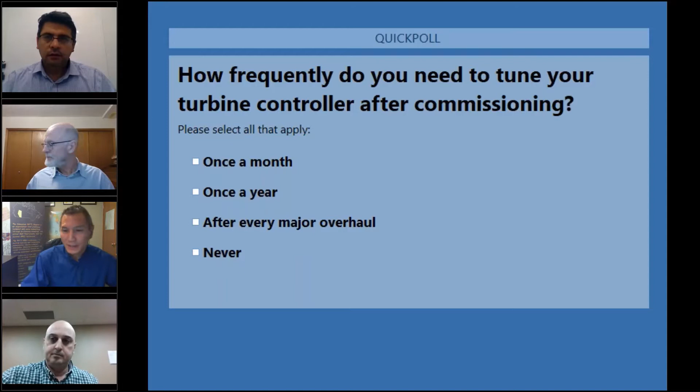So I'll give a quick introduction about myself during this time. My name is Ashraf Abdelrahman. I've been working with Madsen now for 5 years - we are the Woodward representative in Canada. Woodward is a company from 1870, so we started in the 1870s, originally designing governors for hydro applications. Now in 2020, we're doing aircraft engineering and so many other things within Woodward, and we are the representative in Canada.

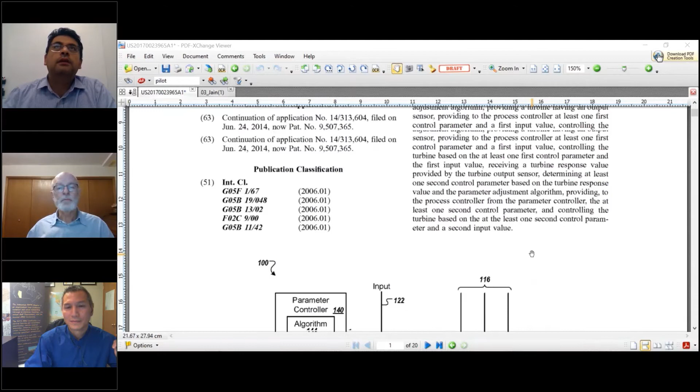Today I will be happy to discuss with you one of the patents that Woodward has made. It's about adaptive PID tuning. I think we've shared that patent on our LinkedIn account, and you can see that patent there. Basically this presentation is all about how we are doing that adaptive PID tuning.

So without further ado, can we see the result of the poll right now? Yes, that would be the perfect time for that. And so here we are.

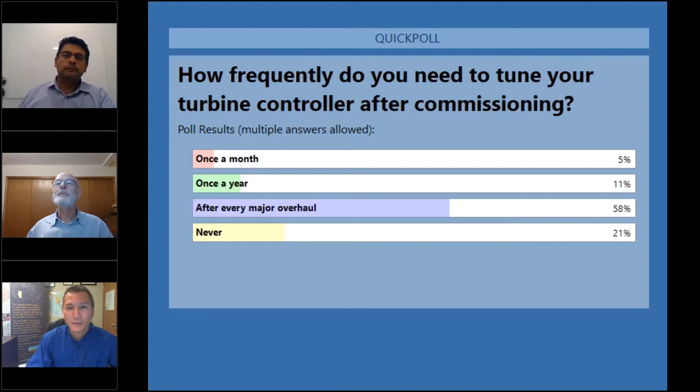Seems like most people are doing it after an overhaul, basically, 58% of people. Surprisingly, 21% have never tuned their controller, 5% say once a month, and 11% say once a year. So it seems like after a major overhaul it makes sense to retune or recalibrate your controller at that point. So I'll shut down the poll and continue on.

Okay, thank you very much. So this is not a surprising value, that most people do the tuning of their PIDs after major overhaul. But today I'm going to discuss a little bit about the issues that we face with tuning of these controllers, and we're going to go through them. After that, we will have a lot of discussion probably about, yes, we need to do it frequently, not frequently, and so on and so forth. So I think by the end of the session we'll have a little bit more understanding about what we are calling the adaptive PID tuning.

Because using adaptive PID tuning, you can do it as frequently as you want, not like back in the old days where you're afraid to do it manually. But let's go through the presentation, and by the end of it we'll understand how easy it is to do PID tuning nowadays, so that you don't have to do it just every major overhaul. You can do it whenever you start to see any performance changes within your turbine.

So conventionally speaking, as a user you have three types of PID parameters you are controlling: the proportional, the integral, and the derivative. If you use only the proportional, you will reach your target but with a steady state error. So basically, if your target is to reach an RPM of 3,600, you will reach 3,400 with a steady state error. To reduce that error, we introduce the integral, which is used to get you as close as possible to zero error. But the problem with the integral is that it sometimes causes delays and overshoot within the system, and that's where the derivative comes in to improve the delays, so you can improve the response within your turbine.

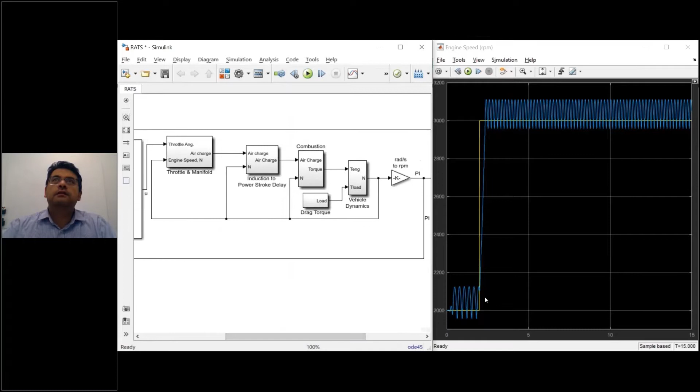For example, I'm just going to give a quick example that we can look into and see how it's working. We have here an application where we have an engine with a speed control, with a PID controller. And as you can see, that engine is behaving unstable. You can see there is a huge error coming out of it, and there is instability within the system.

So to improve the stability of the system, you start to tune the PIDs or use the PIDs. Right now the proportional is 1, so it's almost nothing. So if you start to tune the PID, reducing the proportional, you will see here that the performance of the system starts to improve a little bit, but you still have that error.

Basically the system here is an engine that's required to change speed from 2000 RPM to 3000 RPM. But because of the proportional gain alone, you still have that steady state error. Of course in a normal application this is just a simulation — the steady state error would be much smaller, but this is an example of what the proportional gain does: it just allows you to reach the system target, but you still have the steady state error.

To reduce that error, as we discussed, we need to add the integral gain. So I'm going to change the integral now, putting it into effect. Instead of 0, I'm going to put a value here, 0.01.

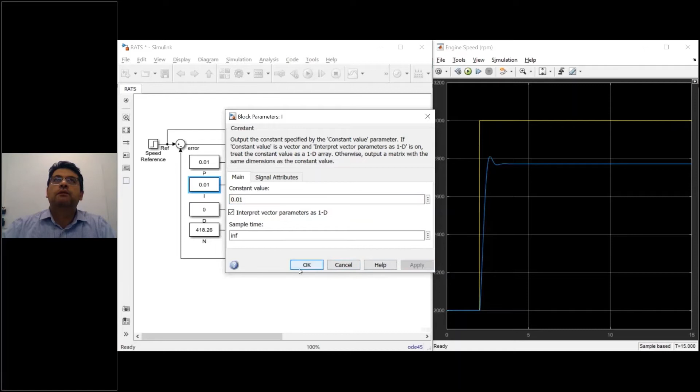And I will run my simulation again. Now we reach the desired effect that we're looking for.

Depending upon how aggressive your system is, sometimes customers use their steam turbine in applications like frequency control, where they need to control the frequency of the whole grid. And sometimes that delay between the actual speed that they are looking for and the controller or turbine to reach that effect makes a big difference for them.

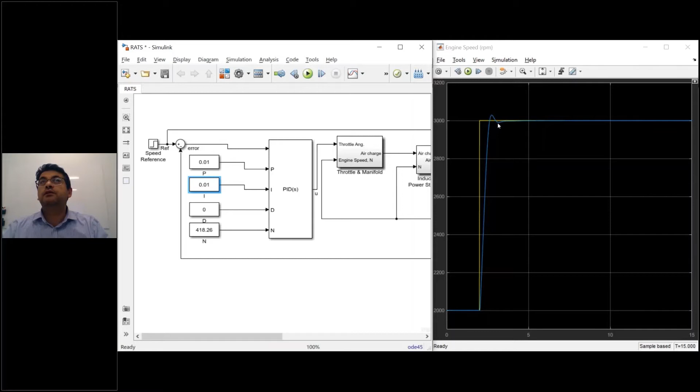So we can introduce at that time the derivative term, which I will introduce right now. And you can start to see that the system will start to become more aggressive to reach its objective, but you will have a faster response out of the turbine itself.

So as you can see here, the turbine response becomes more aggressive, reduces the overshoot a little bit, and you have a more stable turbine.

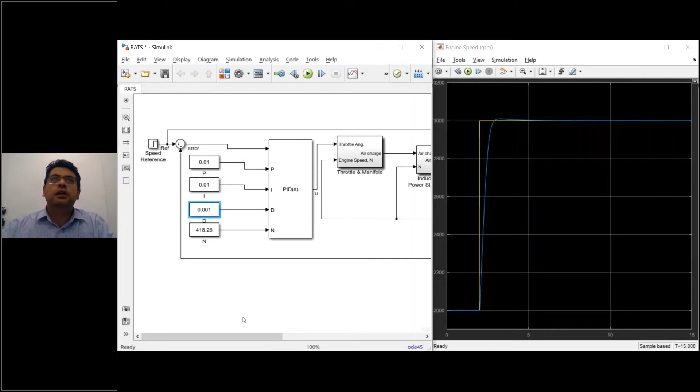So typically, a commissioning engineer will go to the site and spend maybe one or two days until he can figure out what are the values that I need so that I can control my turbine, what are the values that I need to achieve my objective, basically.

And to achieve this objective, usually what we provide, or what we need as control engineers, is to know the system, to understand the behavior of the turbine, to understand the behavior of the final control element, which is usually an actuator or a governor.

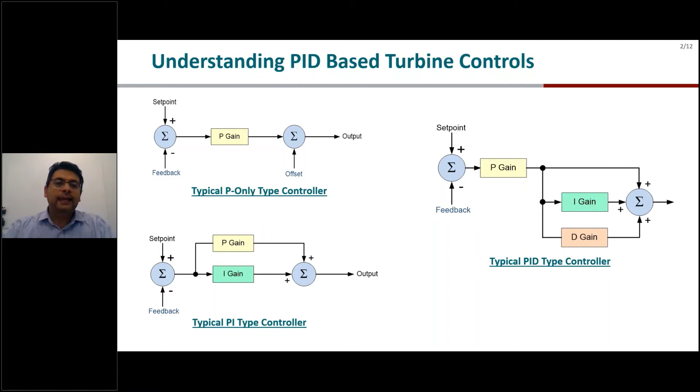So to understand all of these parameters and their effect on your system, we have to understand what can cause instability in my system. I finish my turbine, I commission it, and then I have instability. What are the reasons for this instability? Why do we need to retune our turbine every couple of years as performance behavior changes?

Usually as the turbine gets older, you start to have issues. This is an example for a typical steam turbine governor, where you will have a hydraulic, electro-to-hydraulic valve, then a pilot valve, and then the steam valve itself that controls the opening and closing of the steam, allowing the steam to boost to the turbine.

If you look at them, you may face so many mechanical issues. One of them is the sticking of the governor valve. The other is also the linkage, the linkage between the governors and between the joints in here. As the turbine goes older and older, these linkages start to wear out and have issues. You need to accommodate for these issues within the controller, especially as the turbine gets older.

There is another type of valve which we call poppet valves, which is like 6 or 7 valves, and each one opens, allowing a certain amount of steam to come in. As these poppet valves start to get worn out, you also have some instability coming in.

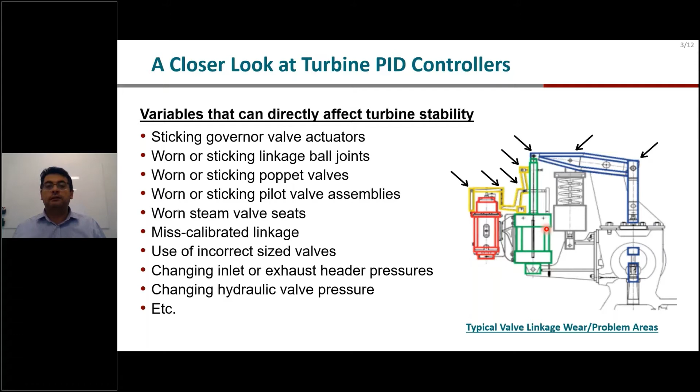To understand how to tune a PID, or to understand how the tuning of the PIDs of the turbine is challenging, I have here two examples of two types of PIDs.

This is a typical example, which we call a parallel PID, usually used within gas turbines, where you will have the speed PID in parallel with the acceleration PID, in parallel with the inlet temperature, in parallel with the exhaust. All of these PIDs go together, and the lowest value from these PIDs will be sent to the actuator so that it will allow more fuel or less fuel to go to the turbine. So if there is any problem with tuning any one of these PIDs, it will definitely impact the stability of the whole system.

If you are able to isolate which PID you have the problem with, you need to make sure that PID, when tuned, performs within the required customer needs. Parallel PID is the way we currently use for gas turbines, and tuning or retuning it requires an experienced engineer who understands the other PIDs and the impact of changing one PID, making one PID more aggressive than another, and understands the different modes of operation of the turbine and the requirements of each mode.

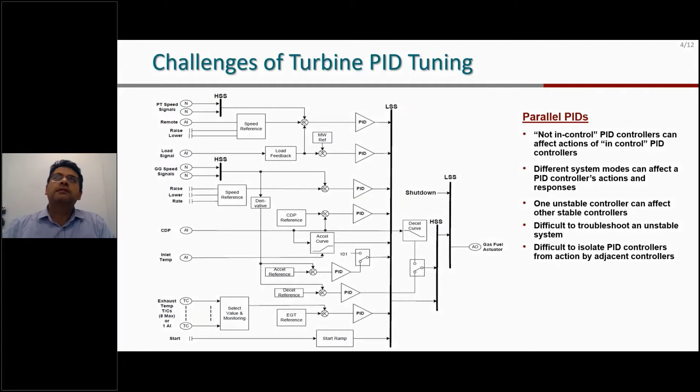In comparison, or in the opposite direction, there are series PIDs, which are typical within steam turbines, where you will see, for example, a cascade PID or a load PID controlling another PID, which is the speed PID. Usually the speed PID needs to be faster in response than the cascade PID, so that whatever change is required by the cascade PID, the speed PID will be able to do it.

And sometimes with the series PID philosophy, you have what we call a ratio limiter, which takes into account the speed PID and the exhaust PID. Both of them go together to what we call a ratio limiter to account for, okay, if the speed PID asks for 50% and the exhaust PID asks for 40%, they go through an equation and tell the HP valve within the steam turbine to open that amount, or the LP valve to open another amount.

As you can see, it's a complicated setup, one PID affecting another PID. Both have to work together in coherence so that you don't have one PID unstable and the other stable, which would affect the overall performance of the turbine.

Usually customers prefer to use the speed PID or the series PIDs in steam turbines because it allows us to control the minimum and maximum process limits. So I can say, for example, I don't want my turbine to go above this value or below this value because this is the maximum value I can reach with my turbine. Or in case I lose the speed set point, or some critical value like the pressure input, I can maintain the last value and control that. That's why people prefer to use the series PID rather than the parallel PID.

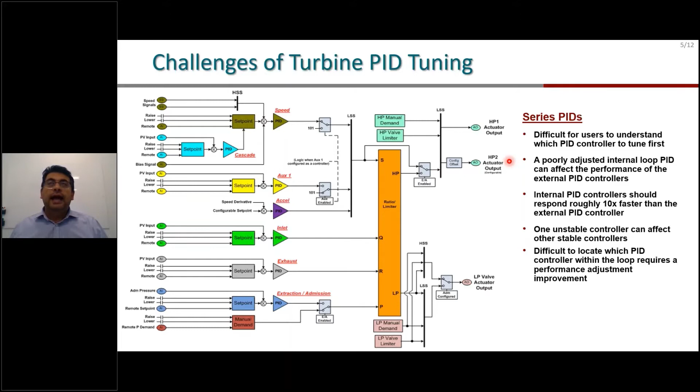But as you can see, these are all kinds of challenges that people need to understand when trying to tune a PID or trying to choose how the PID should react with the other PID. And to be able to solve all these issues, we use different methods in industry.

One of the methods we call the Ziegler-Nichols method, which basically depends on a step change. You connect it to the system, and based on the response of the system, like how much time it took for the system to respond, you start to calculate the proportional, the integral, and the derivative values. Typically, if there is a table for the Ziegler-Nichols method, if you follow the table, you can tune your turbine based on that, and you will start to see that the behavior of the turbine will be attenuated. So, for example, the first overshoot will be 1%.

And then the next overshoot, or the next cycle, you will see attenuation by a quarter of the previous one, and then a quarter and a quarter. So if you follow the typical Ziegler-Nichols method, this is one way of tuning your turbine so that you can optimize and reach the actual stable condition you're looking for. You can also see, during the transient state, that the turbine performance behaves as intended.

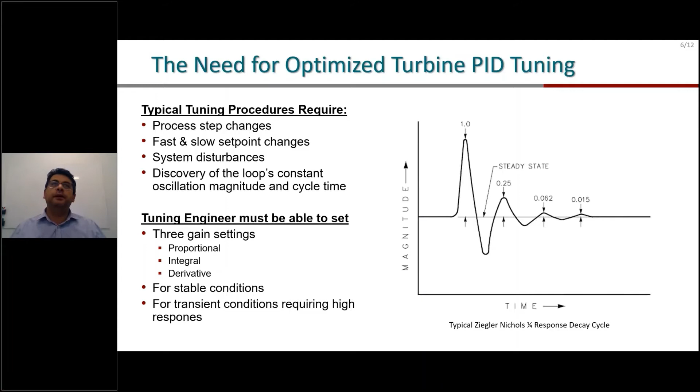In some cases, I'm not able to tune it or take it to the maximum conditions. Sometimes to tune it, you need to take the turbine to instability so you can see the maximum range you can take your turbine to. And sometimes on site, you cannot reach that level. To do that, you always have to have that experience. It takes years of experience to go through it, but it's what we are doing every day.

One more thing that impacts the tuning of the PID is how fast your controller is. For example, if you are using an analog controller, analog controllers are very quick to respond to changes in the inputs. But if you are using digital controllers, the digital controller cycle time means the time it takes from receiving the input, calculating the action, and then sending the output to the actuator or final control element.

That is basically outside of your capability, because the controller itself needs 100 milliseconds to take an action. In some cases, this 100 milliseconds can cause serious damage, especially in steam turbine applications, where usually people design the turbine to suffer serious damage if you go above the maximum governor speed by 20%, which is 120%.

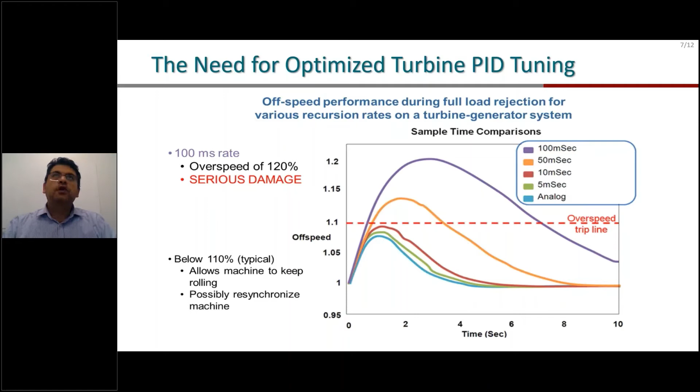Now we are going to go for the solution. Our solution that we have been talking about, and this paper is about, is using adaptive PID tuning. I'm going to show you an example of it right now.

This is where we did the first adaptive PID tuning, and we start to see the behavior changes. I'm going to zoom in so you can see what we actually do with the adaptive PID tuning. The moment we enable our adaptive PID tuning in our controllers, what we do is step changes.

These step changes are in the actuator. So we open the valve and close the valve, open and close in cycles. And the controller calculates how much is the response time from opening the valve until we start to see changes within the speed.

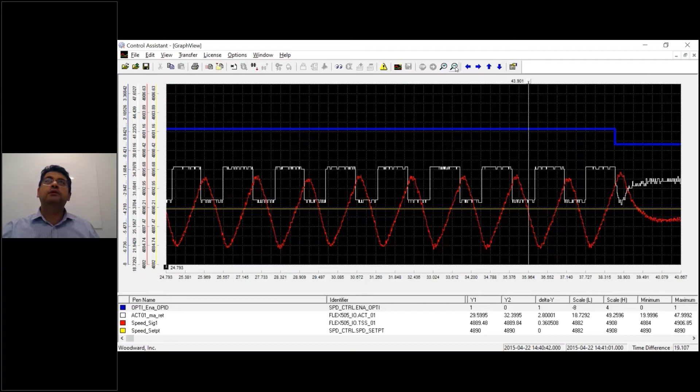As you can see here, we do a couple of these steps at different time zones and different dead times. Based on the calculations we do, we come up with new proportional, integral, and derivative values. The customer will have the ability to see the difference between the old values and the new values, and can decide whether to tune the turbine and change these values or not.

As you can see, by using the adaptive PID tuning, we are able to achieve our targets here. So if you see the error...

If you look at the speed set points, if you would like to see the changes within the speed set point, this is the set point right now, which is around 4,890. And this is the maximum value that we reach, 4,889 RPM. That's the maximum RPM that we reach to.

This was able to be achieved with these low changes, basically due to the ability of the adaptive PID tuning to reach the best steady state point for the unit itself. You can also achieve that manually, but that will take hours and hours and hours, and it may take a long time for you to achieve it.

Adaptive PID technology has been in the market for a long time. People have used different methods for it. One of the methods is connecting your controller inputs and outputs to another software on an outside PC, and that software will calculate, or do what we call learning. Basically, it will calculate how much proportional, integral, and derivative is needed. But by experience, it was found that there are so many issues, basically related to making sure that the scaling of the input and the output is the same when doing that learning curve.

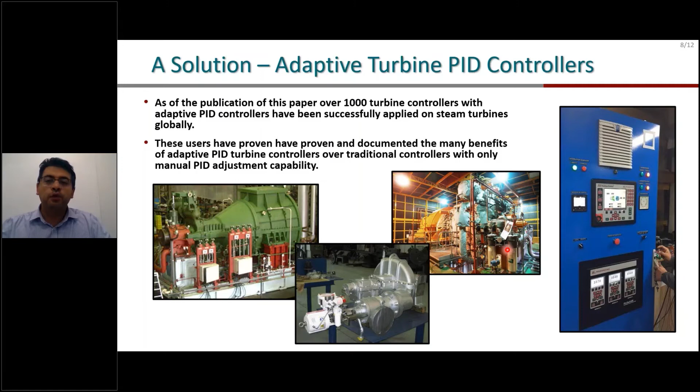As of the publication of this paper, we have been using this adaptive PID tuning in almost over 1,000 turbine controllers globally. We have been seeing very positive results from our customers telling us that the PID tuning has helped them do a lot of tuning and improve their performance, process, and the stability of the unit itself.

Yeah, Ashraf, it's 12:32. Okay, thank you very much.

So when you use an optimized PID tuning, or OptiTune capability, or adaptive PID tuning, you will reach your optimum performance, because it's very hard to do these step changes manually, the ones we represented earlier.

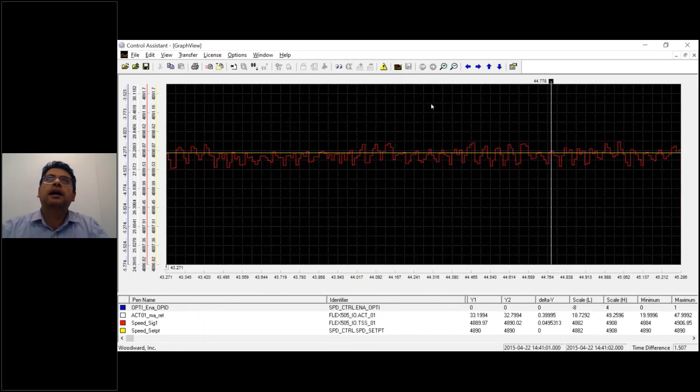It's not done on a computer base, like it's done within the controller itself. So these steps are performed by the controller, and the controller has safety built in. So if one of these steps causes a disturbance within the environment, it will quit the changes and go back to the old unit values.

We have tons of fail safeguards to allow the operator and the team to tune their turbine without worrying about instability happening within the system or the turbine itself while doing that tuning. But when you do it manually, sometimes the turbine goes out of control, and then you have to shut down and impact the process itself.

But when we do it with automatic control, the automatic control will take a quick response to avoid any imbalance or instability within the turbine.

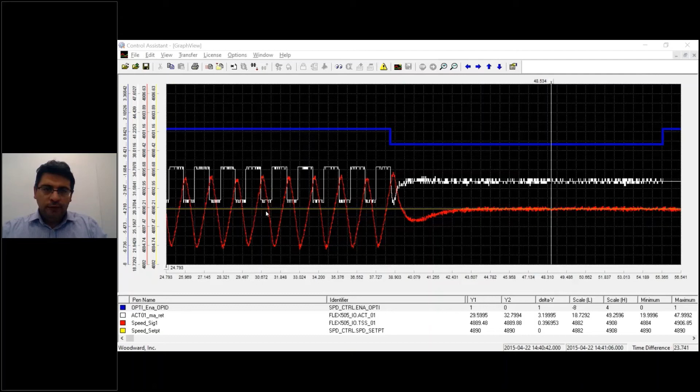We reduced the commissioning time. Before, an engineer would sit down with the operators, tune the value, wait for the system to be stable, then put another value and wait again. By using OptiTune or adaptive PID tuning, we have consolidated all these experiences and used less time for commissioning of the turbine, with the convenience of just pressing a button whenever you see any disturbance. It's excellent.

Now that you just have a button to press, you don't require a lot of training as it used to be. In the past, you had to train the operator to understand the difference between the five PIDs, and if you play with one PID, you may cause instability for another, or cause another issue with the turbine PID. Now you don't have to go through that. Using adaptive PID tuning, all you have to do is press a button, and that takes care of it. You don't have to train people to understand how the other PIDs work or go through these dynamics.

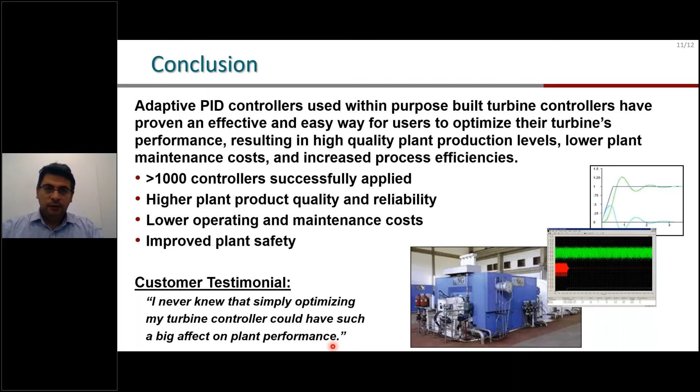Yeah, actually, so QL Sani had a question, whether the PID tuning is certified for SIL 3. Yes, we are using it in our SIL 3 applications, adaptive PID tuning. So we have applications where we have already installed these SIL 3 solutions, and it's been used and it has been certified for SIL 3. Okay, thank you.

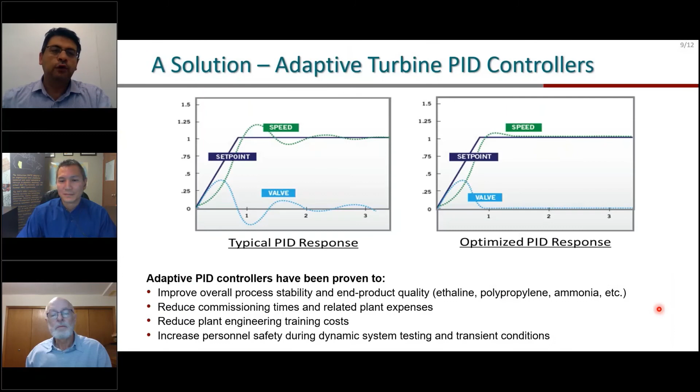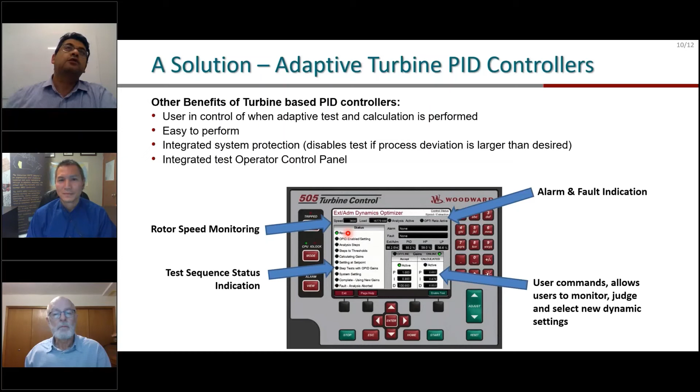So the adaptive PID tuning is already installed in the software, in the hardware itself, so that we can get the values. So if you look at that, that's actually the controller itself, and it comes with the software built in with the adaptive PID tuning, so it can control the turbine and can provide the adaptive PID tuning. It's built in inside, so that all the sensors, readings, everything is already connected to the unit itself, so that it can do the calculation and generate the output that we are looking for.

Where this controller doesn't exist right now, do you actually have to install it, and do you have to add more new instrumentation? And I guess that question goes with, will it apply to both electronic and analog controlled turbines?

So what we usually do is we replace the analog controllers with this controller. So this 505 turbine controller or micronet turbine controller comes built in with this adaptive PID tuning. It's more of a software piece rather than a hardware piece. So it's not like an external controller that you add to. It's actually built inside our controller itself, the adaptive PID tuning.

Is it suitable with anyone's turbine, or does it only work with one that has an existing Woodward system? It's suitable with steam turbines—we have it installed in any type of steam turbines, gas turbines, and SIL 3 applications where it required adaptive PID tuning. It's basically a software piece added to our controllers itself, allowing it to reach or tune the unit itself.

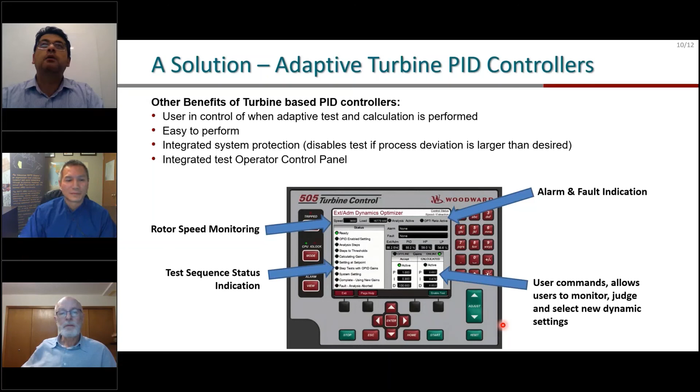Oh dear, looks like we may have lost him. Oh yeah, yeah, it looks like he's frozen there.